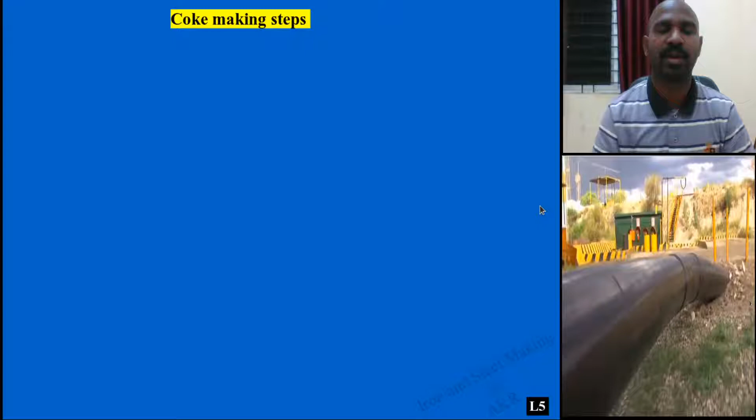Welcome to Iron and Steel Making course. Today I am going to teach lecture 5. The topic is coke making steps.

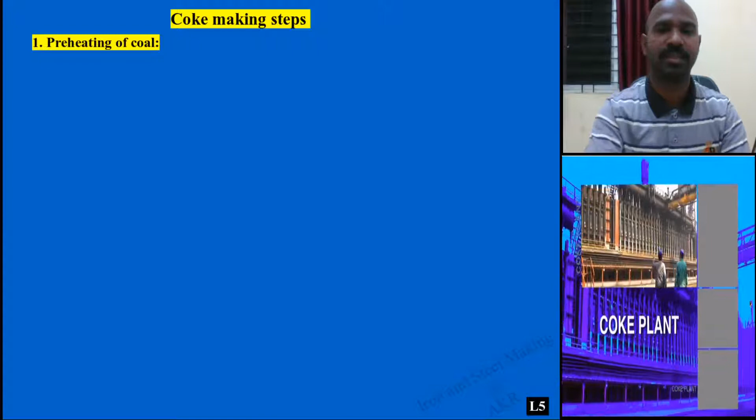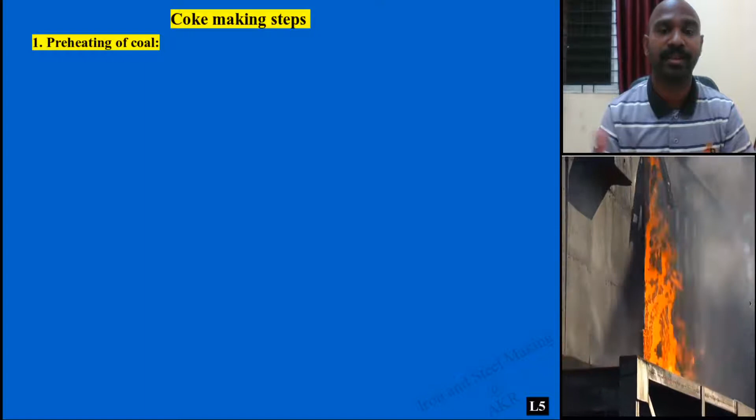Broadly, this gives an idea about how coke is made and what steps are involved. The first step, as you collect the coal from the mines, you are supposed to preheat it. Why do you need to preheat it? What is the purpose? If you have not done the preheating step, what will happen?

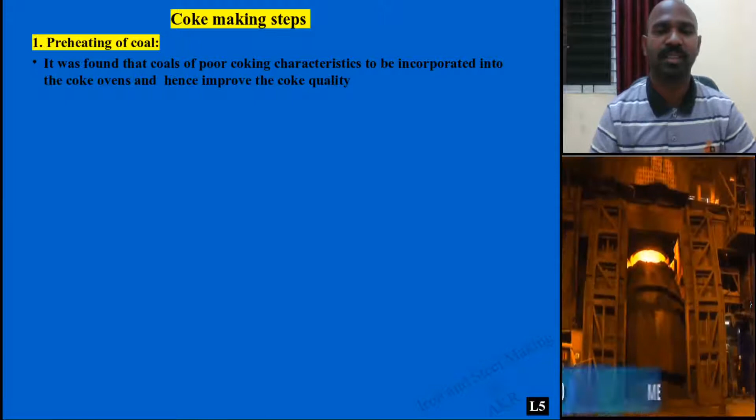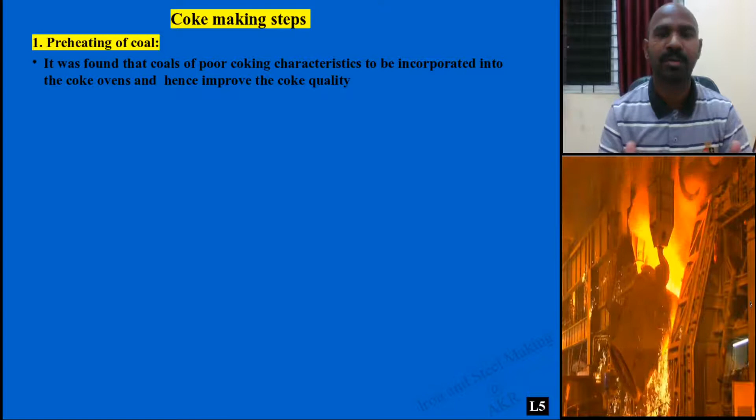There will be some moisture content. Most of the coals are found to have poor coking characteristics, which you cannot directly incorporate or put in the coke oven batteries for converting coal to coke.

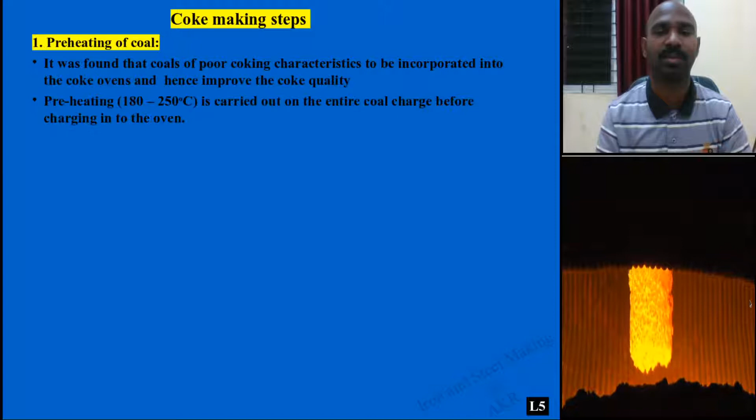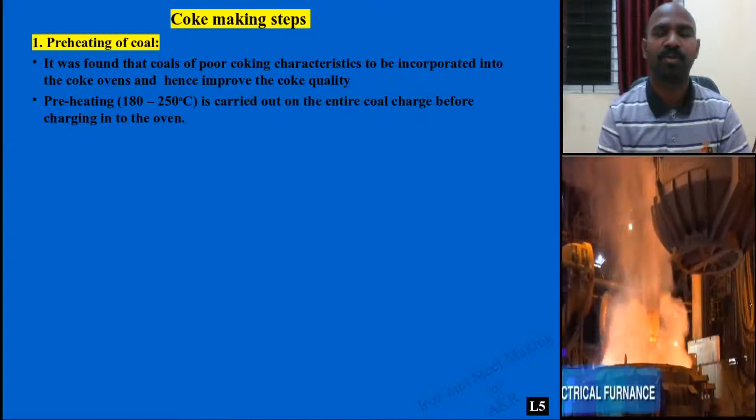Hence, to improve coal quality and remove moisture content, you use the preheating of coal step. Preheating temperature used is around 180 to 250 degrees Celsius, done in a closed box which resembles the coke oven battery box, preheated batch wise, and once preheated, it is sent directly transported to the coke oven box.

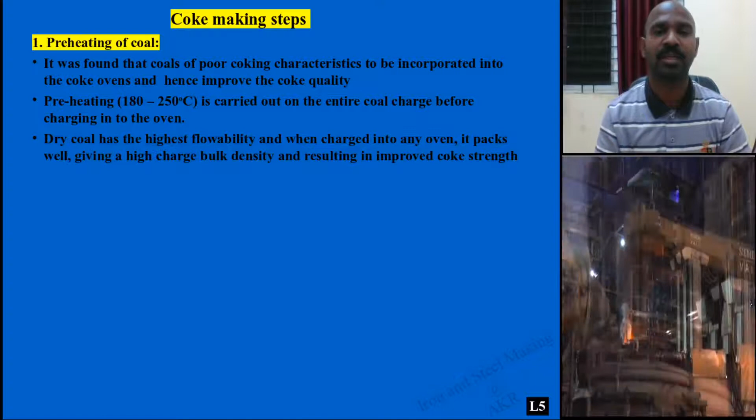Because of preheating, the coal becomes dry and is observed to have better flowability, and if some moisture content is there, it is removed, making it suitable for making coke.

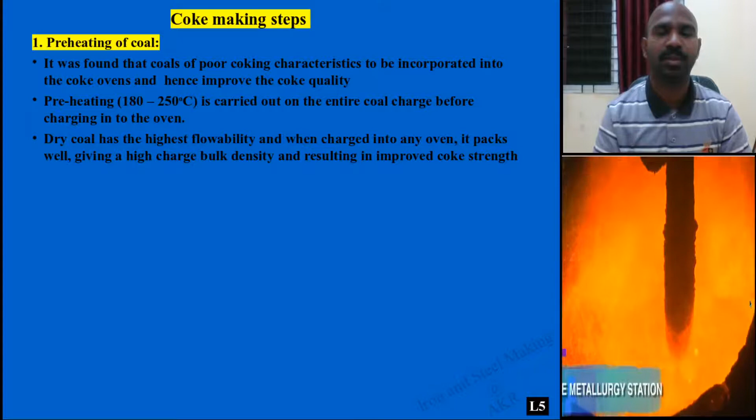The resultant effect is it improves the bulk density, coke strength, and coke reactivity strength. Coke strength after reactivity, all those things get improved.

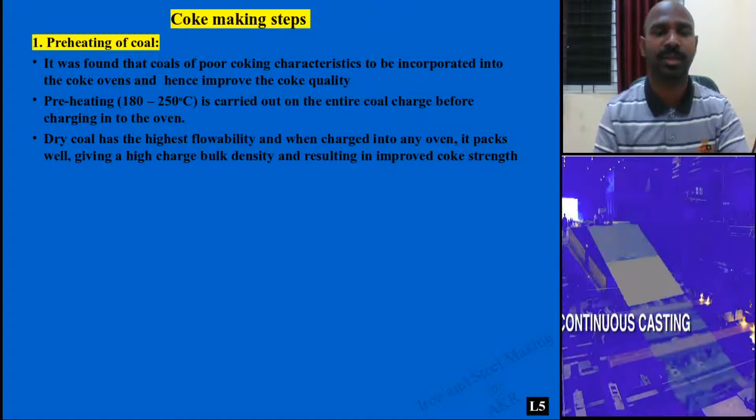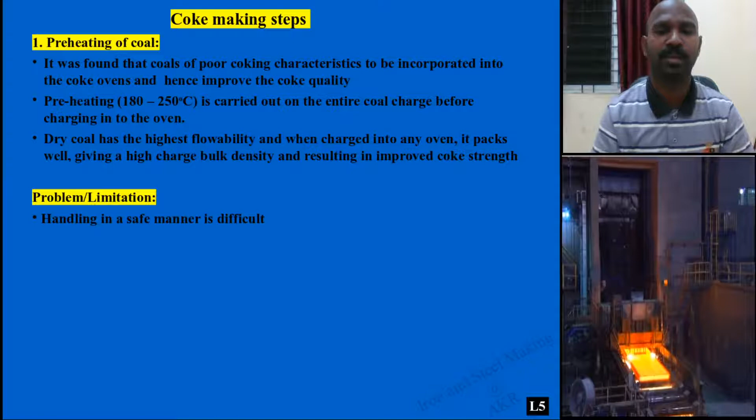So that is why preheating of coal is essential, though the problem is handling it in a safe manner. This particular step is difficult because it involves large temperatures, dust loss, and all those things happen.

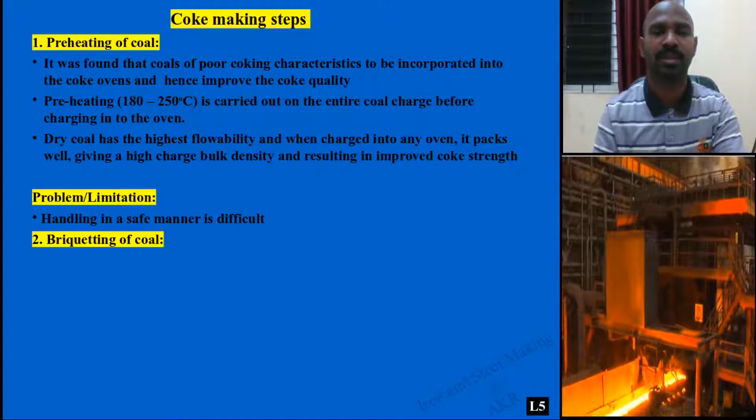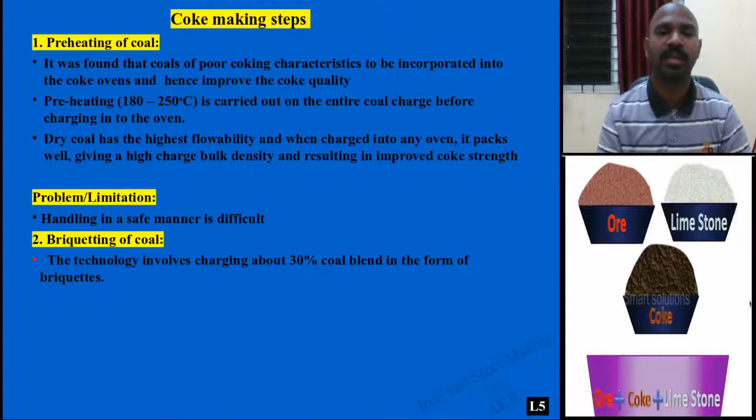Coming to the next step, after preheating, the preheated coal is sent to the briquetting section instead of directly sending it to the coke oven batteries. This technology involves around 30% of the coal in the entire preheated coal. For 1 ton, 30% of the coal is blended or mixed in briquette form, not the entire preheated coal.

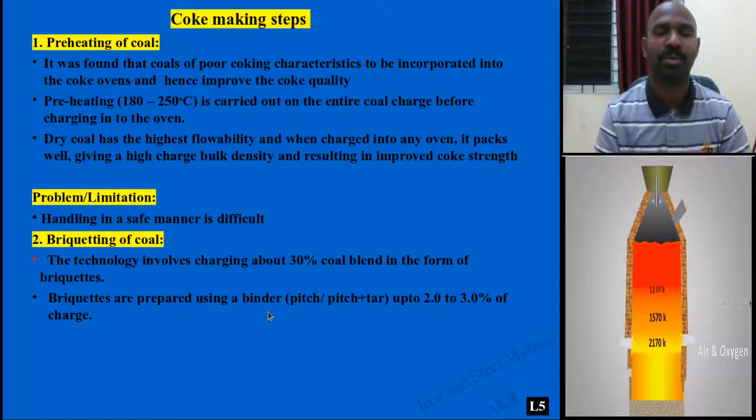This particular blending cannot be done without a binder. The binders in practice could be pitch or tar, which are byproducts of petroleum and coal. Those are used as binders. The binder allowed is around 2 to 3% per charge, and this ratio is maintained.

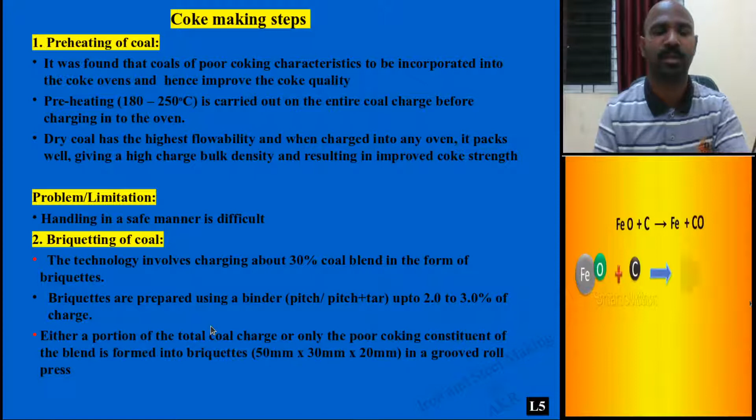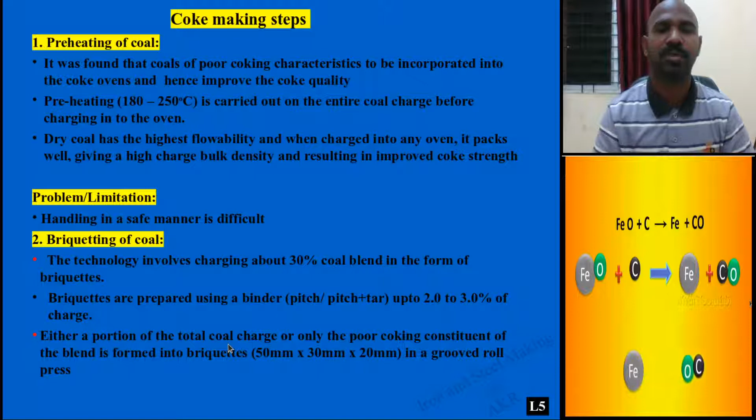Sometimes it may happen that the total preheated coal charge is briquetted, or only the coal with poor coking characteristics is separated and made in the form of briquettes.

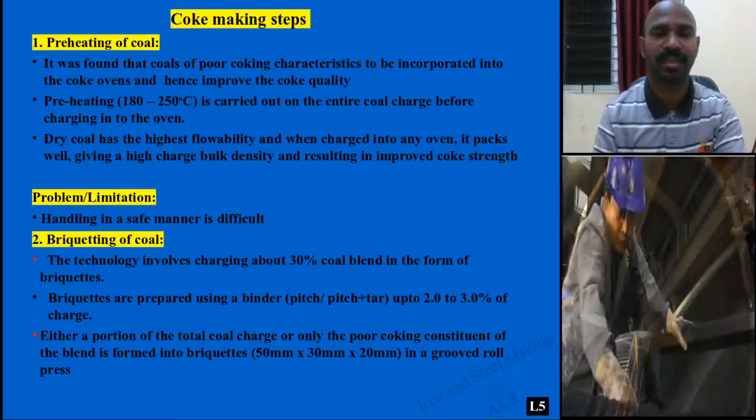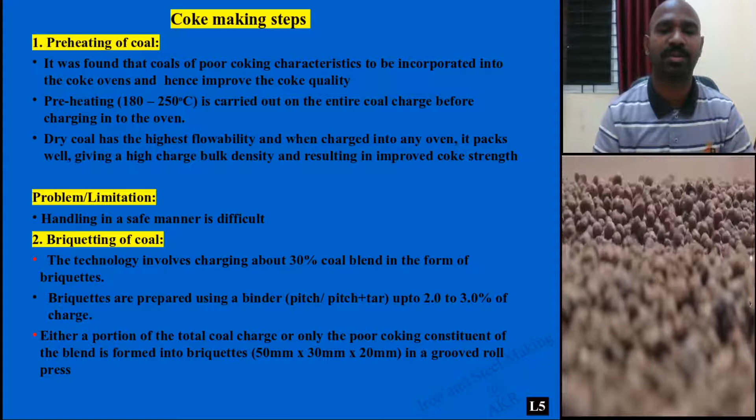Regarding the briquette dimension - why is it called a briquette? It is not brick shaped, it is just like a rectangular shape with a certain standard dimension. Technically you call it a briquette: 50 mm length, 30 mm width, and 20 mm height, which is pressed and formed in the form of a briquette using a grooved roll press.

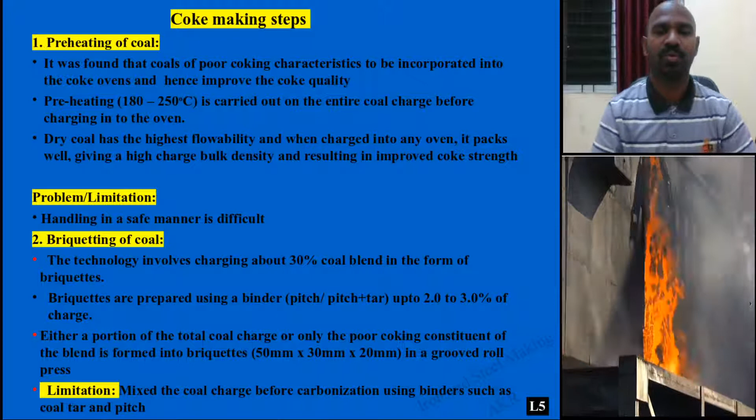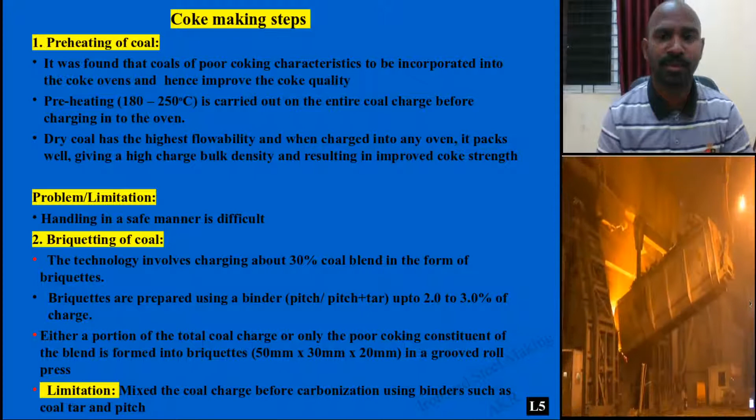The grooving has this particular dimension, 50 by 30 by 20. The limitation here is you need to mix this coal with the binders before carbonization, either with tar or pitch, maintained in the proper portion or ratio. Various other modifications and steps are included in the coke making process to increase strength or coke quantity.

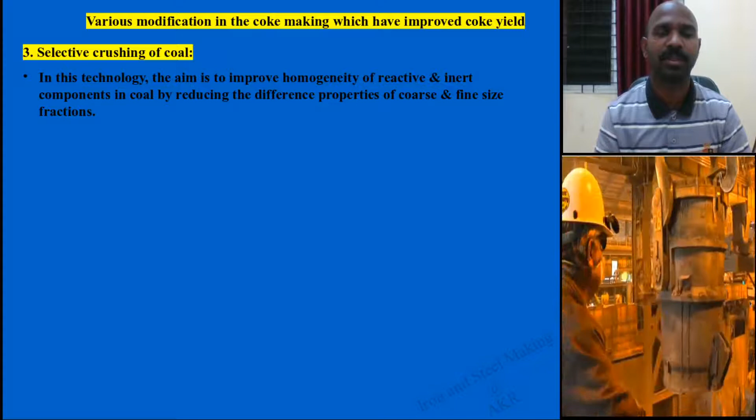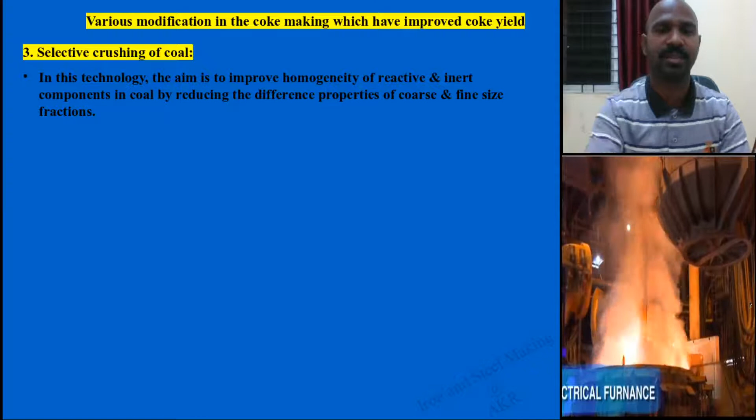One more step is selective crushing of coal. This technology aims to achieve homogeneity of reactivity across all coal particles, and if there are any inert components, inert gases, or associated gangue material, reducing that particular size variation between coarse and fine sizes, reactivity differences can be separated and crushed selectively.

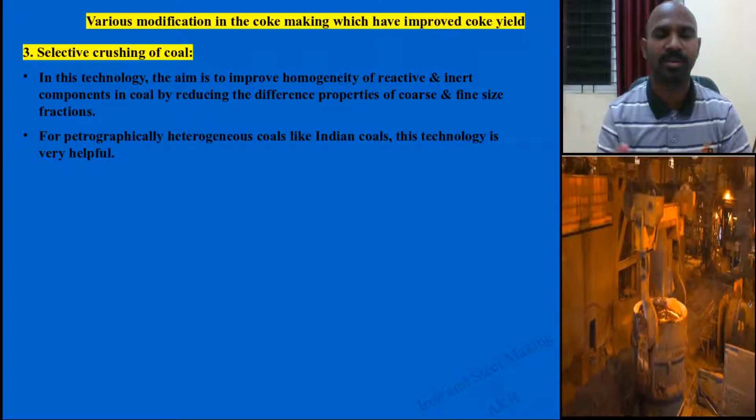All the coarse particles will be crushed in one place, fine size particles crushed in another place, which has an advantage. Petrographically, while choosing coal for making coke, these characteristics are essential, and particularly in Indian coals, this selective crushing of coal technology is helpful.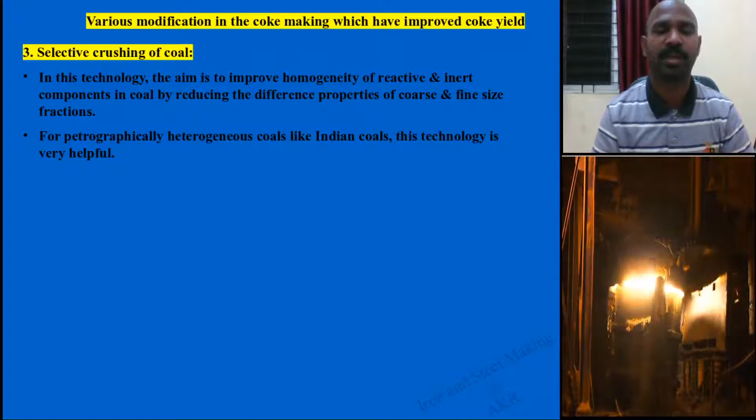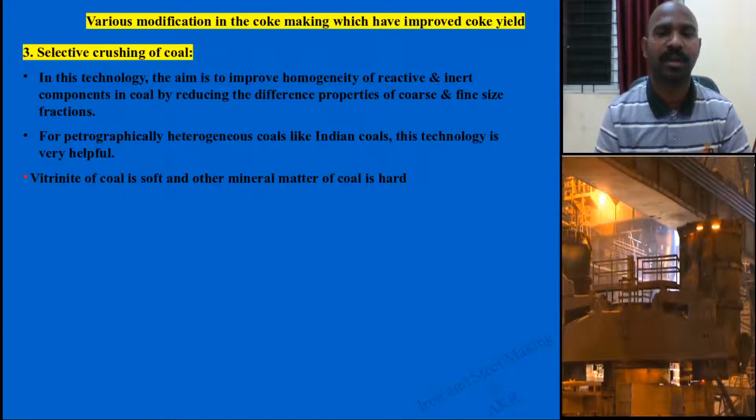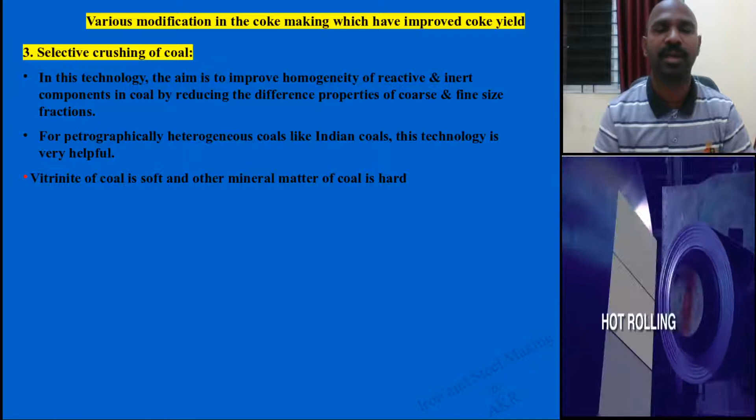Coming to vitrinite of coal - what is the actual meaning of vitrinite? In the last class I told the partial definition. The vitrinite of coal is another mineral matter associated with the coal, just like gangue is associated with iron ore. This vitrinite is associated with coal in the form of glassy, rock type mineral matter. This is not a part of coal, and it is not just like the stages of coal such as bituminous and anthracite.

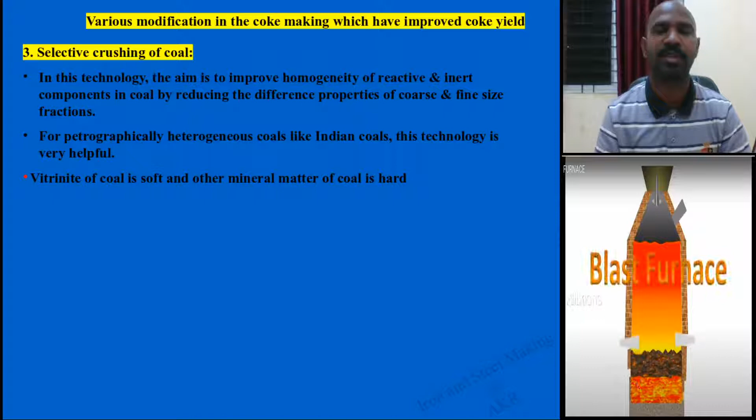This is associated mineral matter with the coal, which is soft, and other mineral matters associated with the coal are hard. Because of this particular soft and hard nature of mineral matter associated with the coal, crushing becomes very important in this situation.

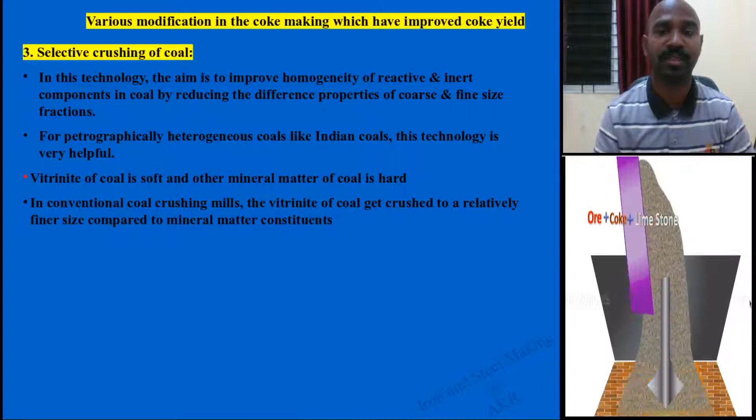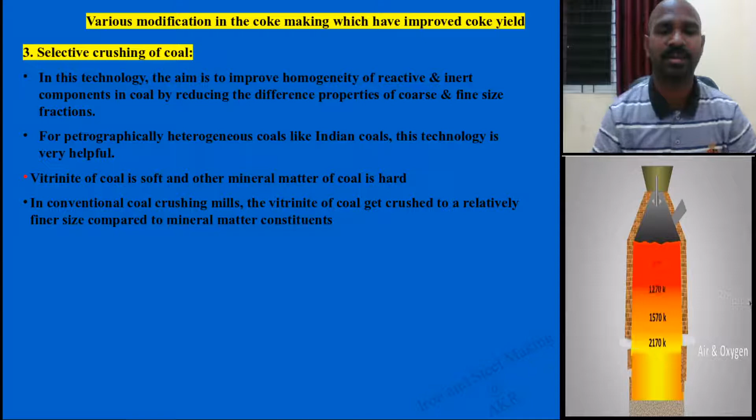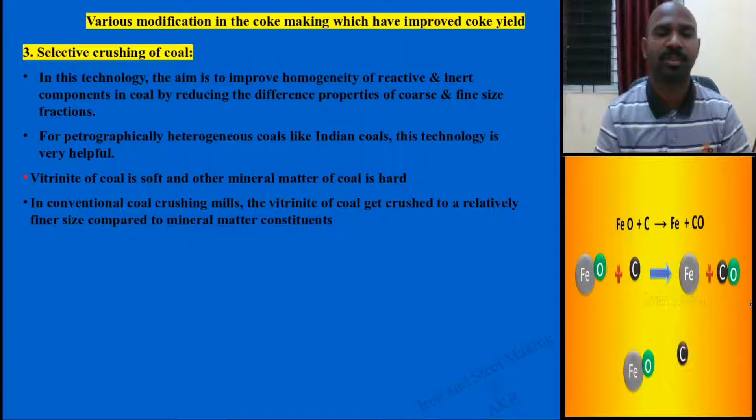Crushing, especially selective crushing, is important. In conventional crushing mills, the vitrinite of coal becomes finer in size compared to the other mineral matters associated with coal, since those are harder. So the vitrinite becomes finer in size. If you combine these and load them into the coke making oven battery, it gives different properties, and you may not achieve good coke strength and quality. If you do selective crushing, the yield of coke will be more and you can improve it.

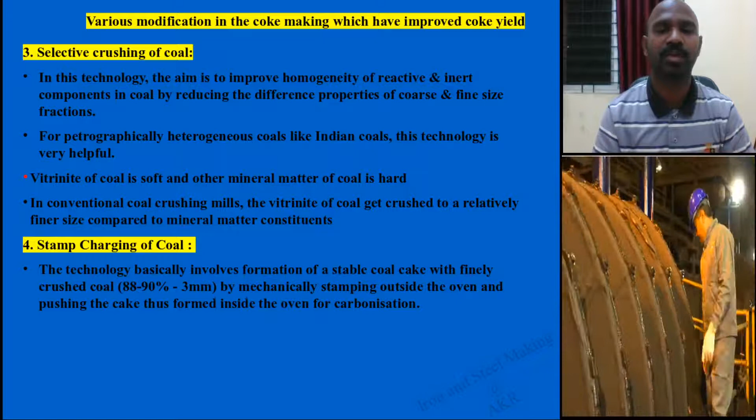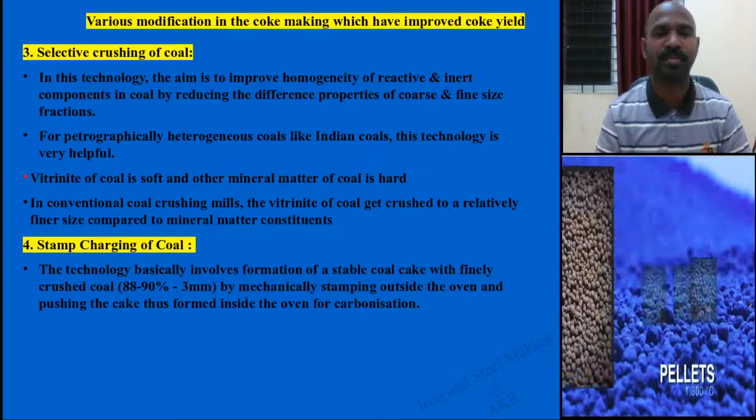Another step included is stamp charging of coal. This particular mixture of fine size and coarse size can utilize other technologies. You can form a stable coal cake by addition of some amount of binder, done mechanically. This mechanical working step happens outside the coke oven battery, forming a coal cake, which is then put inside the coke oven battery before carbonization starts.

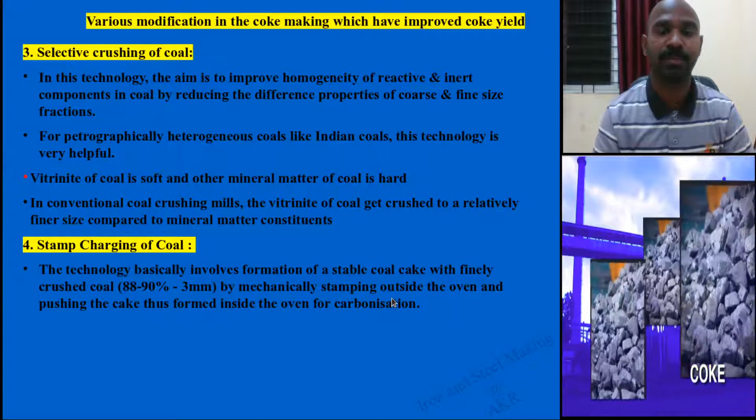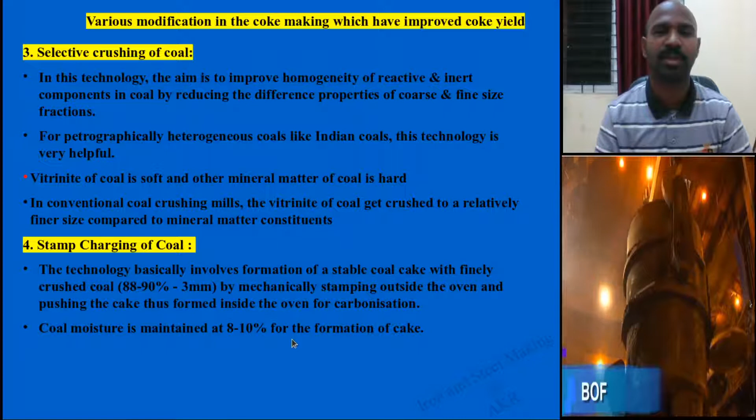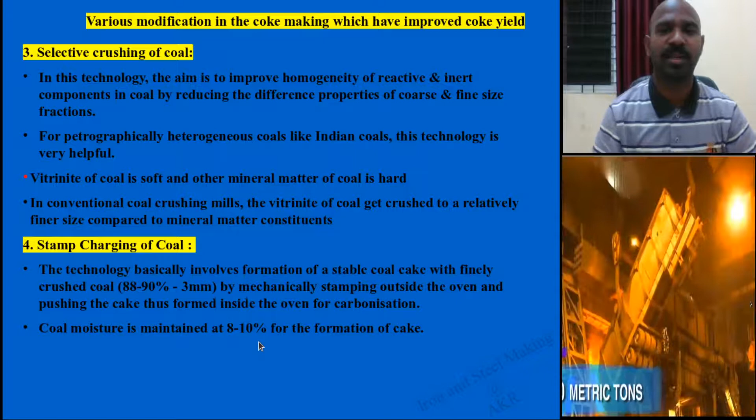Carbonization occurs around 1100 degrees Celsius temperature, and the coal moisture allowed is 8 to 10% to form the cake. This much moisture content is allowed. This is the limitation of moisture or binder and the coal you are selecting to make coke.

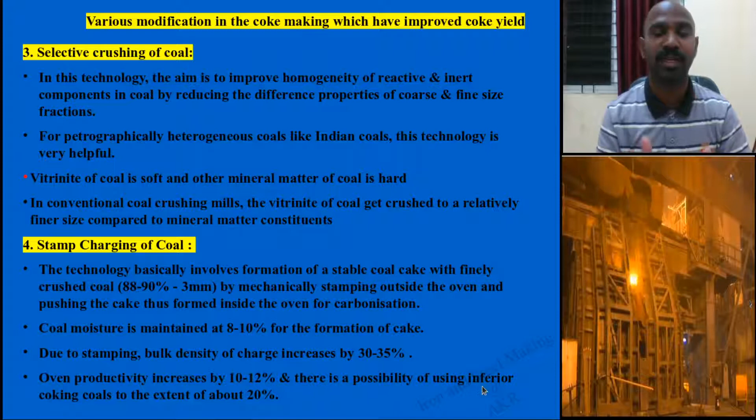This particular stamping gives the advantage of increasing bulk density, and overall productivity also increases by 10 to 12%. There is also the addition that poor coking characteristics can be incorporated when including the stamp charging step. About 20% of poor coking characteristics of coal can be included, and a combination of fine size and coarse size can also be included.

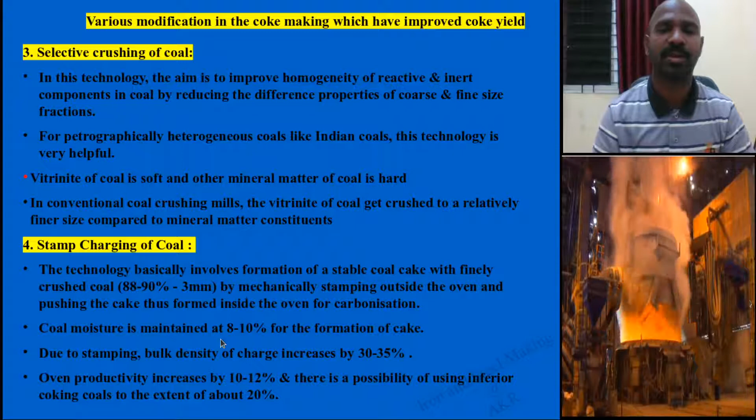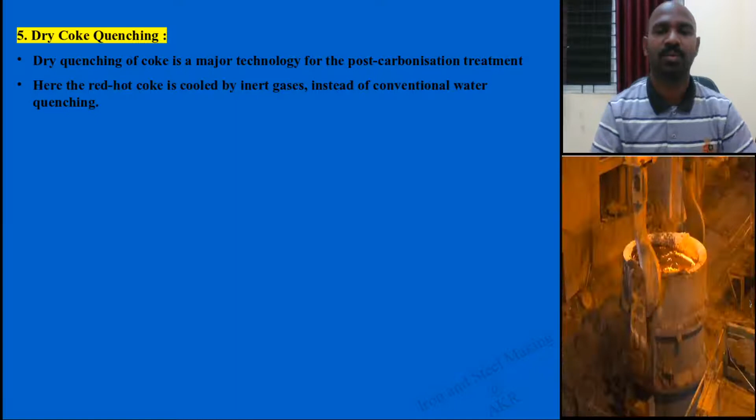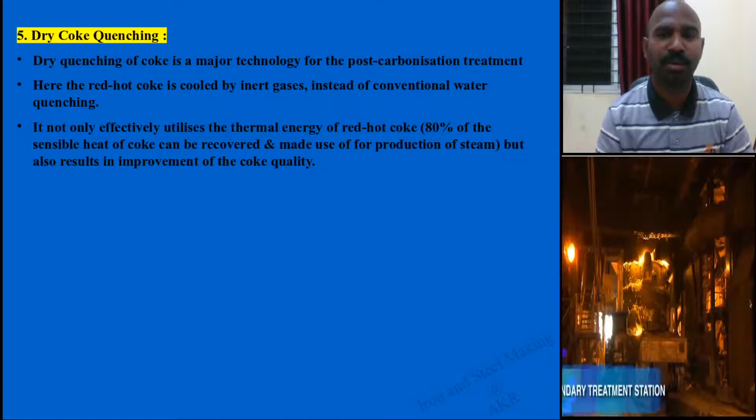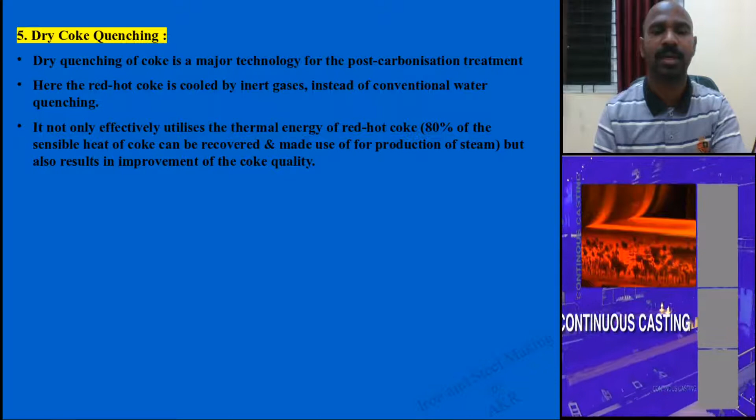Another technology, a post-carbonization technique, is dry quenching, or dry coke quenching. Here you use inert gases. It is cooled by inert gases instead of water quenching. The red hot coke is taken and inert gases are used to cool it. The advantage of doing this is that it not only effectively uses the thermal energy of the red hot condition, but also improves the coke quality - fine size, large size, less porosity, and reactivity. Strength will be improved if you include these steps.

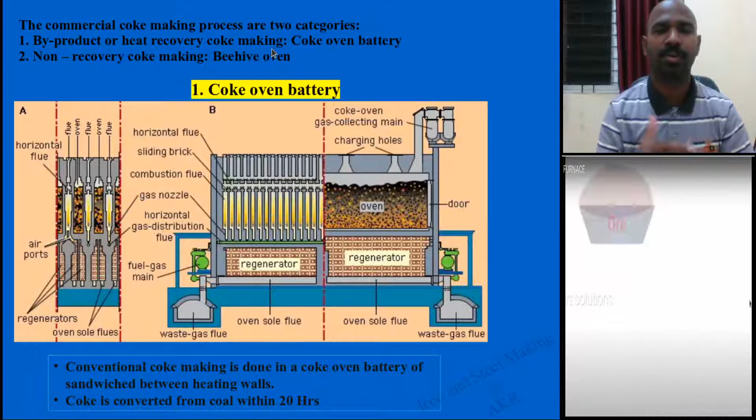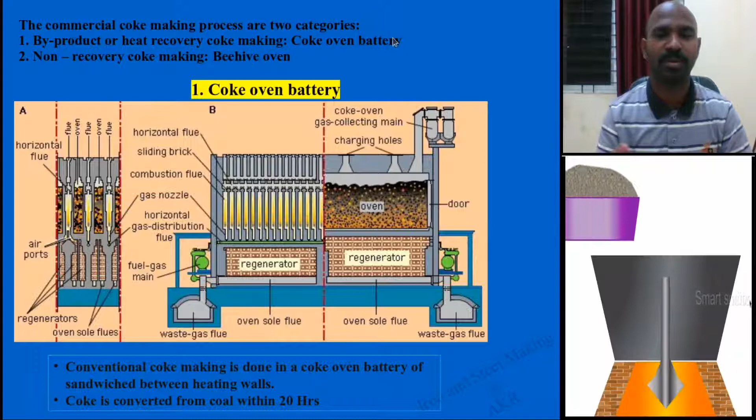One is byproduct or heat recovery coke making, where you can recover heat using regenerators constructed with refractory bricks. Another type is non-recovery coke making, called Beehive coke oven - short name, coke oven battery, for this process.

This is the coke oven battery. The center line gives this side - this is a box of the coke oven box. From the top you charge the coal, and finally the gases which evolve are collected, and this is the door. Once inside this oven the coal is made into plastic and the strength quality is improved, it is taken out from this door.

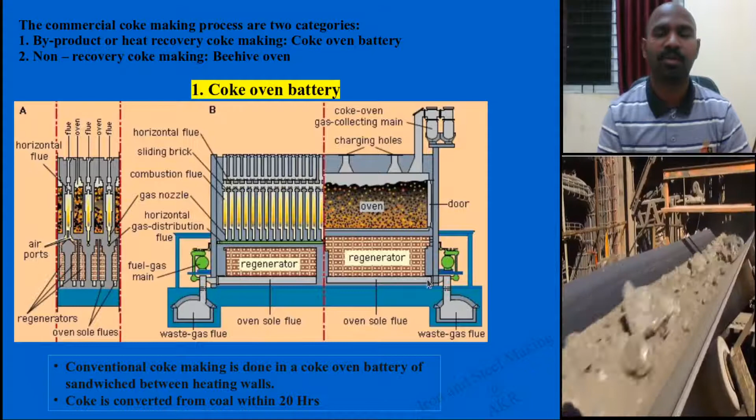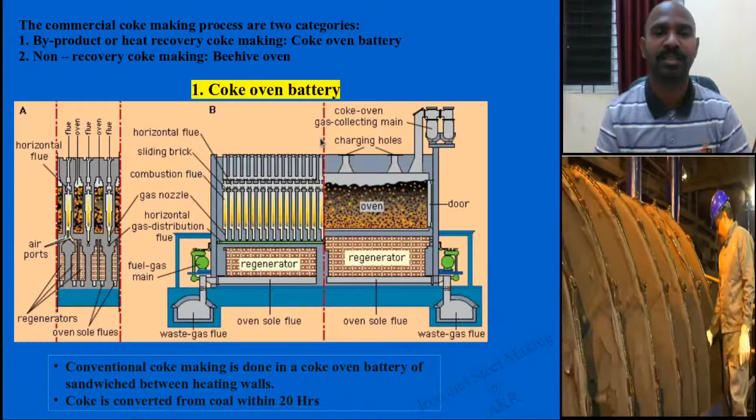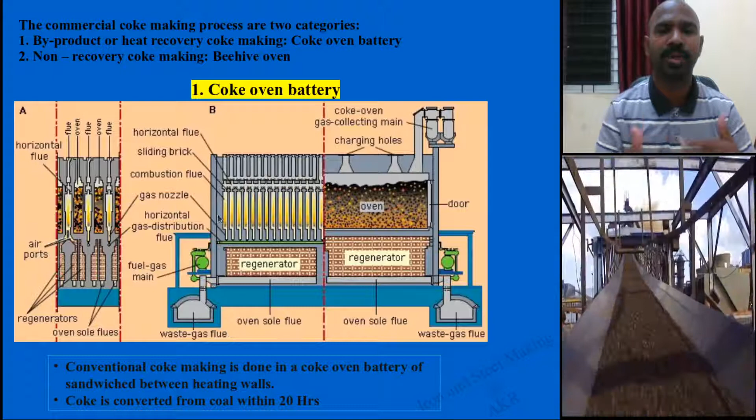Below this there are regenerators, constructed with refractory bricks, where gases and heat can be restored - any waste gases are stored here and sent to the atmosphere after a while. This is the side view of the oven box. The side view shows the wall of the box, and this is coal. There will be a number of these, and at the bottom is the regenerator.

Let us look at one box separately. If you observe, this is coal, and from here the air passage - air ports - allow air passage. These are the regenerators. This is shown more clearly, and this is the flue gas.

The flue gas which goes out is collected at this top portion, and this is the oven. It is also collected horizontally. The flue gases are collected horizontally, and this is the main combustion, where combustion occurs in the oven, and these are also constructed with bricks, sliding bricks.

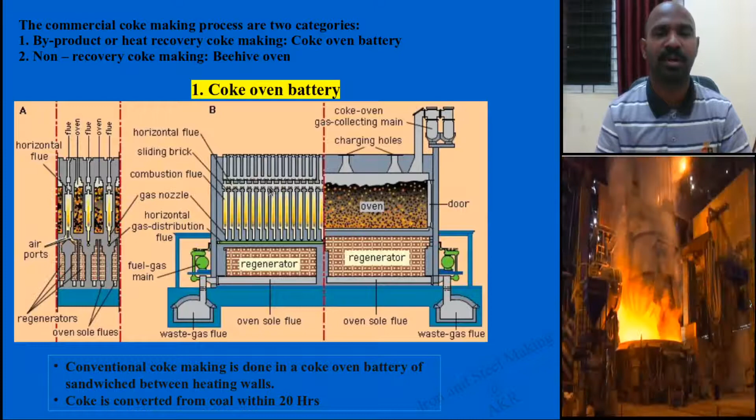This particular charging hole, the charging box transportation box, will slide over this particular sliding bricks. Horizontal flue gas passage pipe, and main for regulating these particular gases. This valve main, fuel gas main, can be controlled. This is side view, this is the oven box, and this particular oven box is explained here clearly.

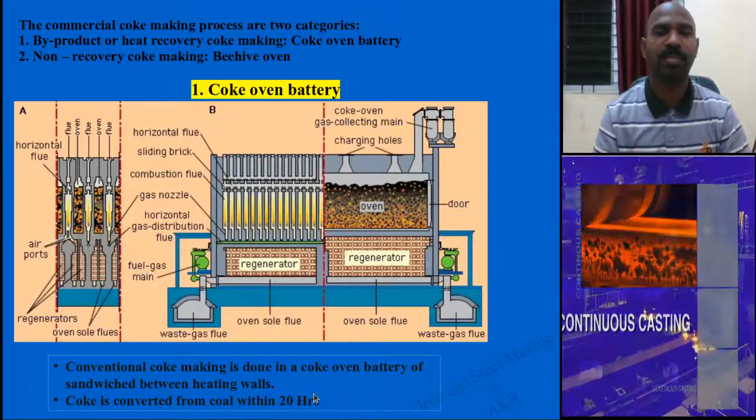This is conventional and modern coke oven batteries. The Vizag Steel Plant also maintains these coke oven batteries. Constantly it takes the coal and produces the coke. Before coming here, the preheating step, stamp charging, briquetting, all those things have been done before coming to the coke oven battery, and coal is converted to coke within 20 hours. This is the advantage of coke oven batteries.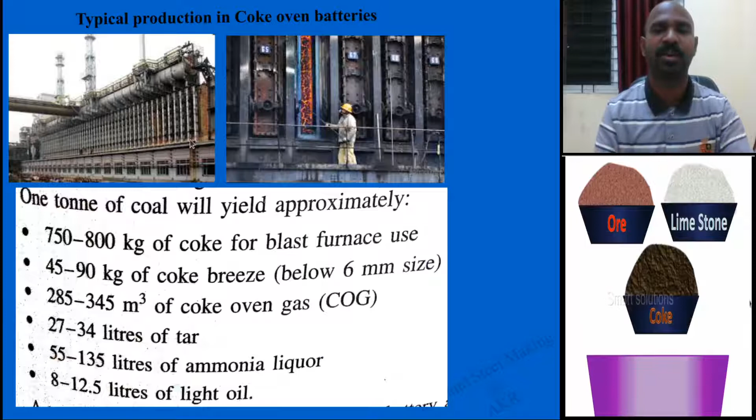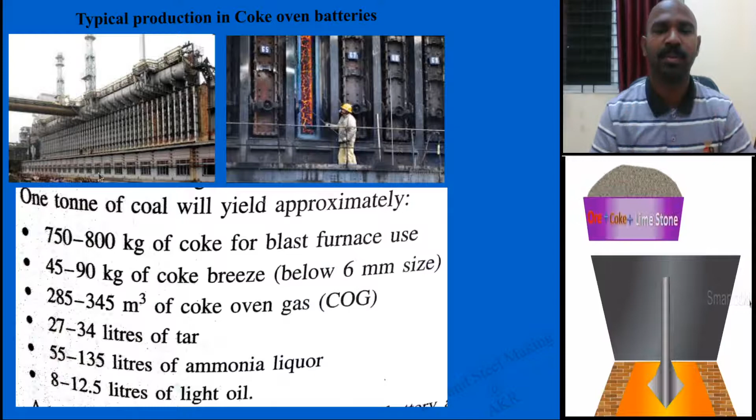For example, if you put 1 ton of coal in this particular box, this is the entire mechanism. This many number of coke oven batteries are there, and continuously you feed from this particular conveyor. You pour this particular coal and you take out the coke from this side door, and this is the side view, the actual cross sectional view.

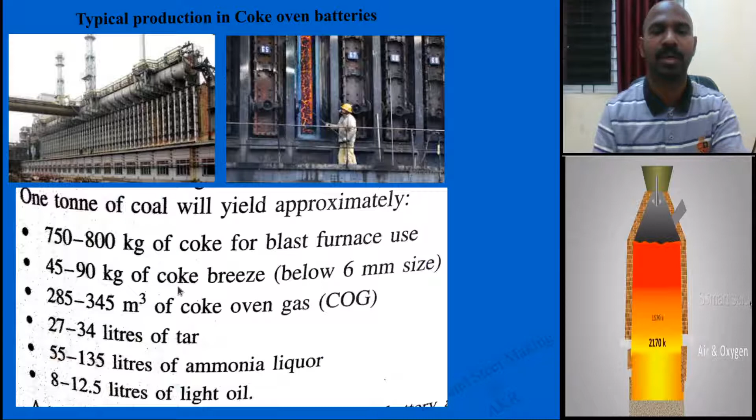If you take 1 ton of coal, finally you will get only 750 to 800 kg of coke, which can be effectively used for blast furnace pig iron production. There will be some waste of coke breeze. Breeze is nothing but finer size coke particles which are less than 6 mm in size.

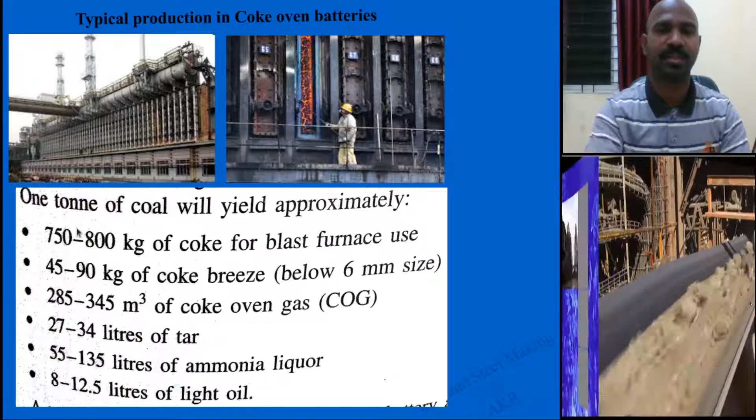There will be coke oven gas, COG. This much amount of gas is going waste, but you recycle it in the case of coke oven battery. As a binder you use tar, ammonia liquor and light oil, this much liters quantity, and this particular volume of gas is going out. This is typical production in a coke oven battery.

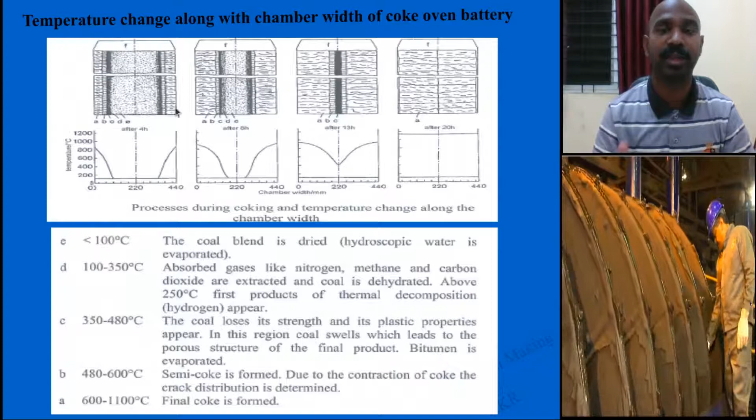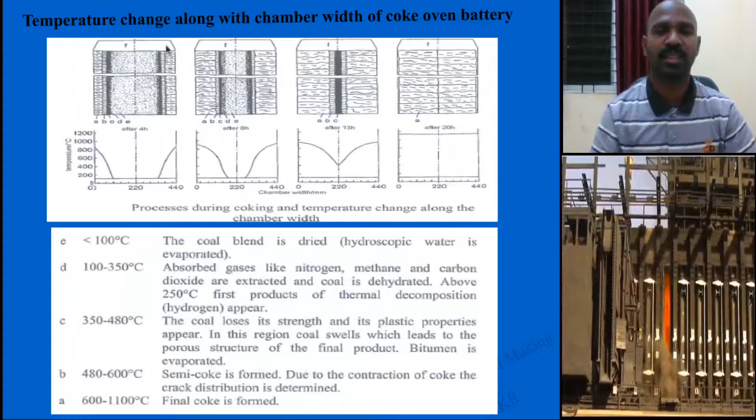Coming to temperature change, if you take one coke oven battery, how the temperature is changing, how the conversion of coal and finally coke is happening. Observe this particular width with respect to time. This is the width of the box, 440 mm, a chamber, one chamber. You call it one coke oven battery. This is 220, a central line.

After 4 hours, this is how it looks. It has been given the nomenclature A, B, C, D, E. What is A, what is B, C, D, E, explained below. I will explain. In this box, after 8 hours, A, B, C, D, E looks like this. After 13 hours, after 20 hours, only A remains. What is A? Final coke. This is final coke within a coke oven box in one chamber.

For example, if you see A, this corresponds to the temperature of 600 to 1100 degrees Celsius, which is final coke. Only this much width in the entire chamber, this much coke is formed. Coming to the semi coke, 480 to 600 degrees, 480 to 600 degrees Celsius temperature, that is B. After 4 hours, this is semi coke, not completely coke formed.

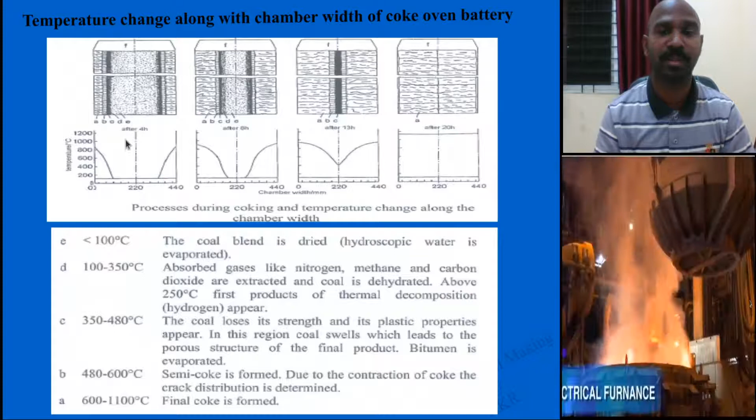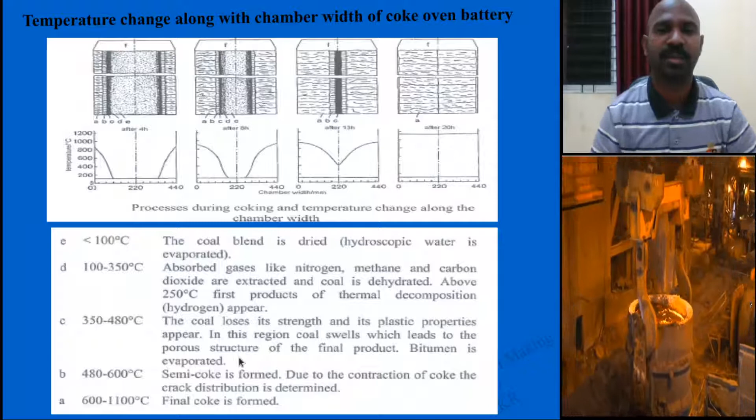This is 350 to 480 degrees C, where the coal strength is going out, converted into coke strength - plasticity, semi-plastic to plastic changes will occur. And D, there will be some gases absorbed, such as nitrogen, methane, carbon dioxide, all absorbed within this particular chamber. From the horizontal and vertical flue gas waste, it is being collected at the top.

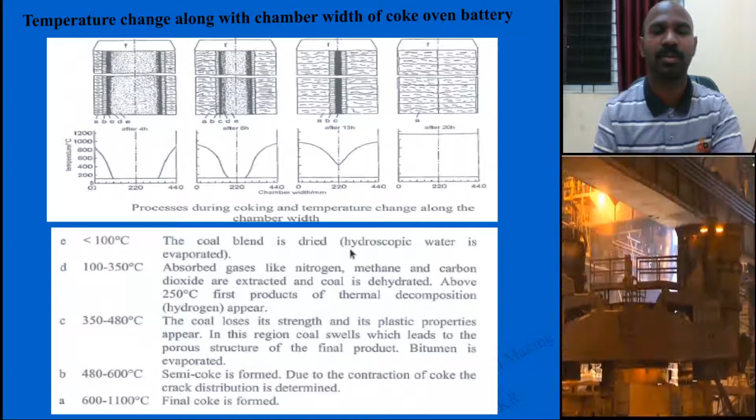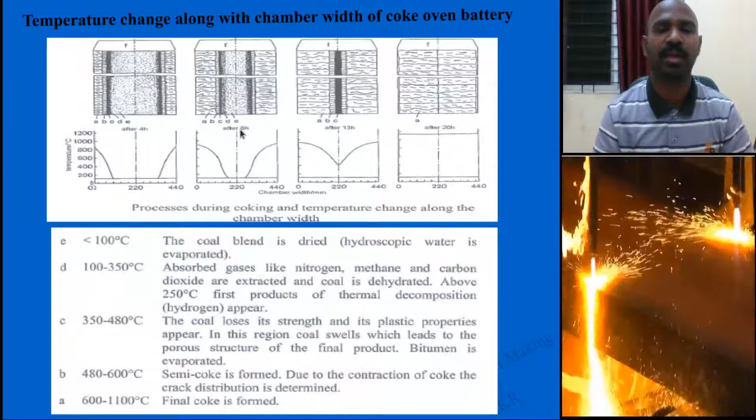And if you see E, which is coal only, coal blend is added after preheating and drying. After drying, it is added in this particular chamber. If you see these 5 steps, after 8 hours, this is the change - this is coke. After 13 hours, this much is the coke. After 20 hours, the entire coal is converted into coke. The gases are collected. This is one typical schematic of a one chamber coke oven battery.

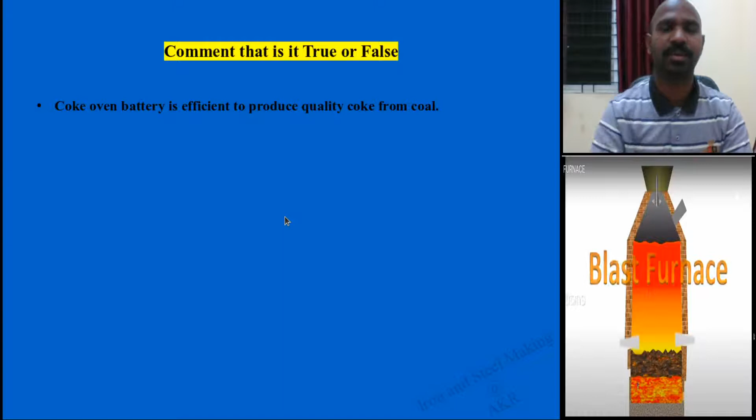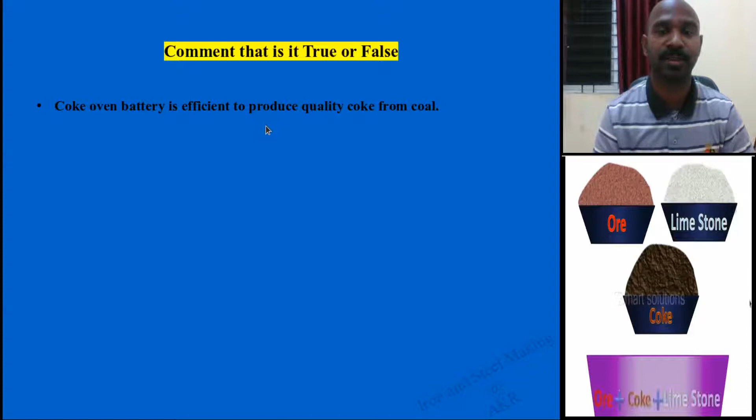Now at the end of this particular lecture, give your opinion whether coke oven batteries are efficient to produce quality coke from coal, which are practiced in modern days. Please give your opinion whether it is true or false. Thank you.